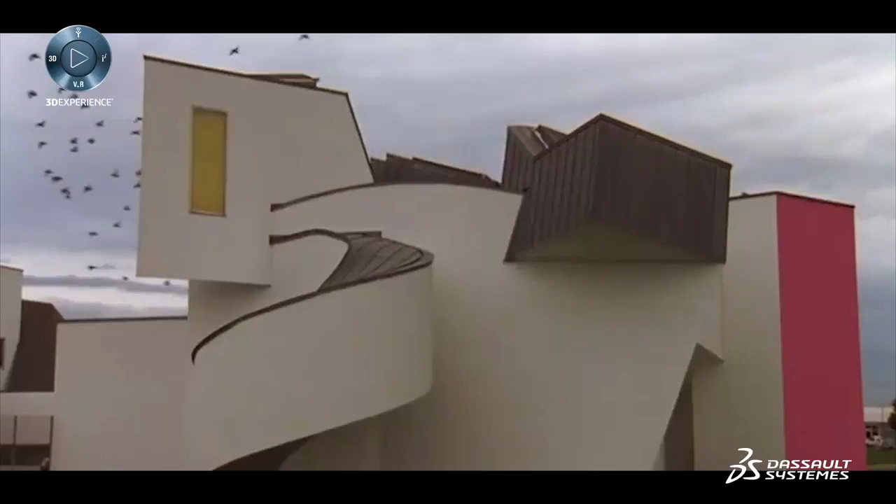I want to guarantee that we can build that vision. And I want to guarantee that we can build it at a price that the owner can afford.

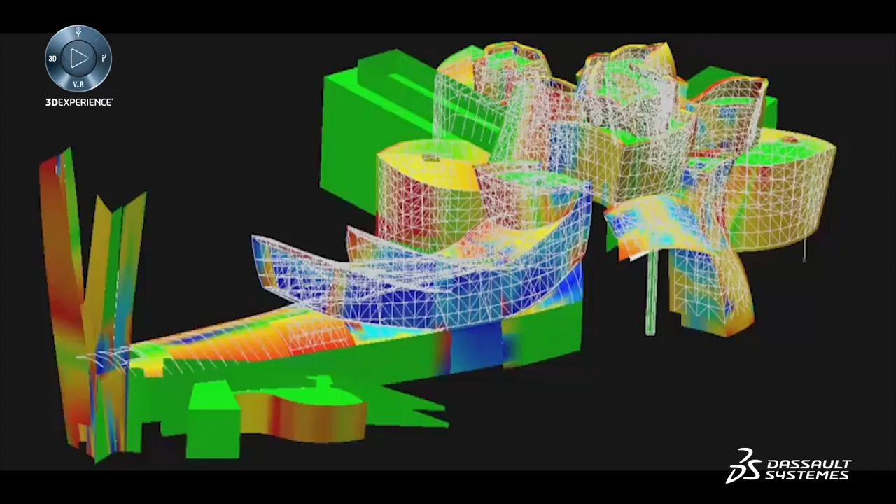The first project of significance was Bilbao. And we took our team to Bilbao. They spent a week with the 6 steel subcontractors, and they trained them how to use CATIA. And the bids came in 18% under budget, 6 separate contractors, and a 1% spread. And when I saw that, I realized we got powers here that architects don't usually have.

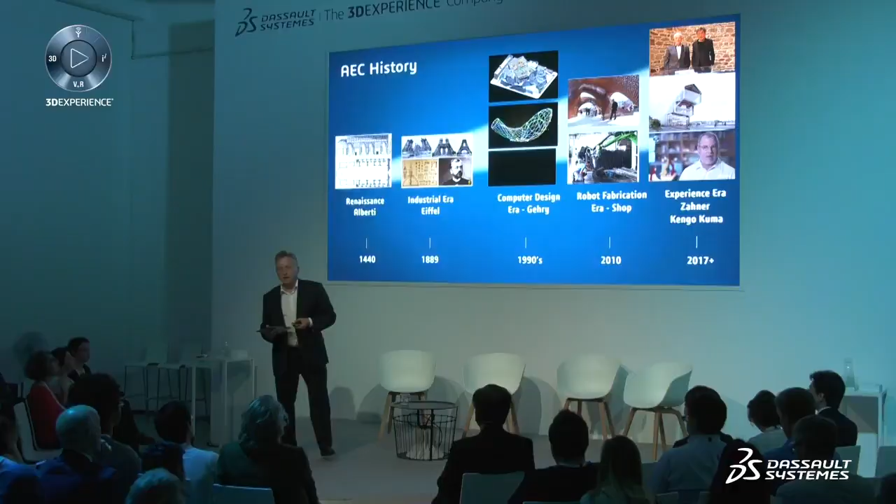18% under budget - this is something I think we don't see very often in the construction industry.

Then, of course, in the year 2010 came the new world of making, the new way to fabricate. You all know about 3D printing. Some architects, like Shop Architects, imagine new shapes, new structures that would not be assembled, but printed by a robot in one piece.

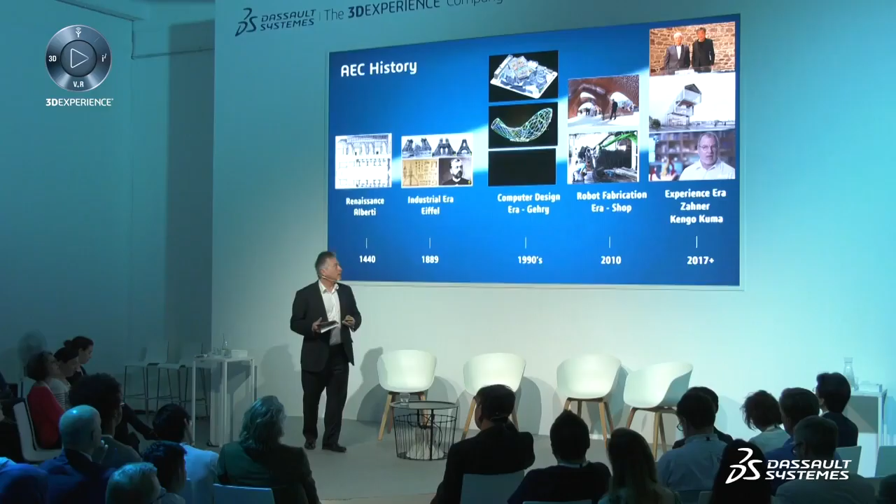And they have erected what is now the tallest, the biggest 3D printed structure in the world. This is located in Florida, and you see a picture on top. It's a little kiosk, and this was completely automatically manufactured from the shape defined inside CATIA, and completely robotized.

By the way, this is also the era for automation. It's extremely tedious, of course, to model a complete digital mock-up interactively. So Shop also created a way to automate the process. They created the Barclays Center in New York, which has 12,000 panels. And those 12,000 panels, with all the attachments, all the rivets, all the fasteners, were created automatically.

Just to tell you an anecdote, during one of the nights, the architect came and said he wanted to change a curve on the original shape. And they generated the 12,000 panels again over 2 nights. So this was the era of automation and fabrication.

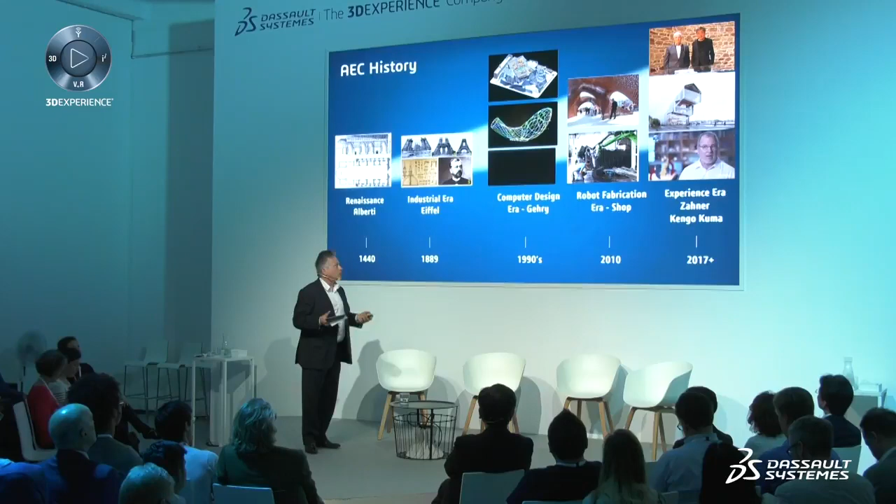Last thing is what we call the experience era. In the experience era, we see transformation again. I quoted 2 examples. One of them is Bill Zahner, who is a facade maker in the United States. And of course, we'll speak about Kengo Kuma, who is also extremely visionary in the way architecture will evolve. Let's listen first to Zahner about the dynamicity of the construction industry.

Today, everything is rigid, not moving. Let's listen to what he says about that.

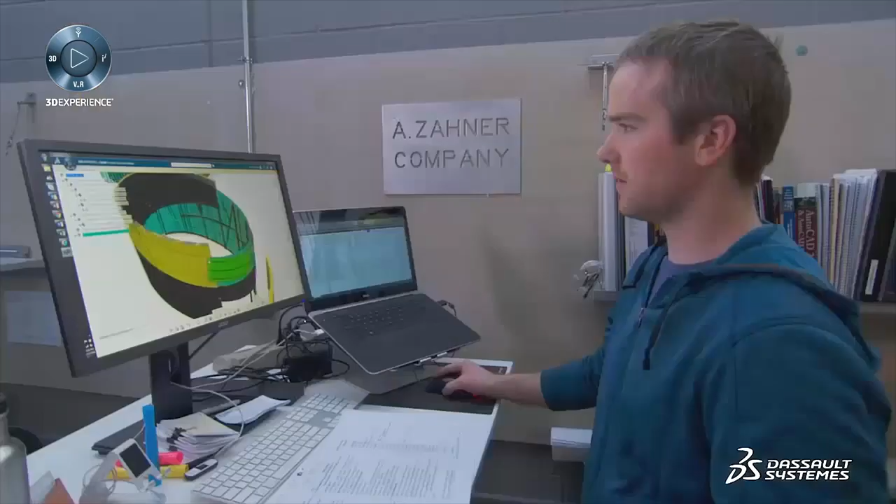One of the biggest changes, I think, in the future are going to be the dynamic aspect, kinetic aspect of facades or of other constructs. It's going to be how they're going to change in shape. And 3D experience is going to allow you to predict that and know what it's going to do, know what sort of forces are going to be exerted on that shape as it's moving. And it does it in such a way that it's going to open up avenues to the design community and fabrication community to do some really amazing things.

So buildings which are breathing, which are moving, which are changing shapes based on your emotion. A second illustration is what we have installed here, the breathing sculpture that you see there, which of course is extremely dynamic, connected to nature. And I'm very proud to share this session with Kengo Kuma, because Kengo Kuma has a philosophy of breathing material and applying material mimicking nature.

So he will speak about that in a moment, so I will not spoil the whole speech, but I'm very proud to say, for example, that Kengo Kuma was awarded to build the next big museum, the Oceanic Museum in French Brittany, to replace the existing one, which was a little bit not breathing enough, I would say. So this is a picture actually taken in Saint-Malo, who is hosting this new piece of architecture.

Then we introduced life cycle management with manufacturing, maintenance, and diversity of products. And I like to tell this story - we invented this in the year 1999. Some people in the AEC industry call it BIM, Building Information Model, but this is exactly what PLM does for all the other industries.

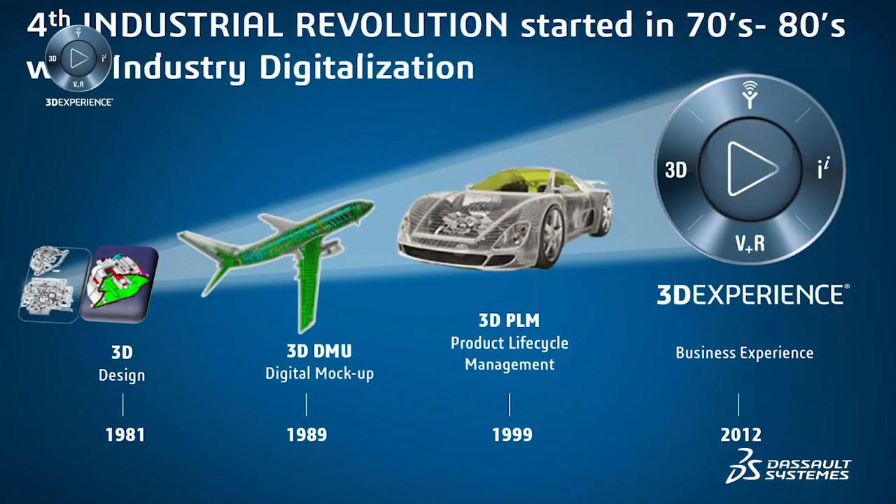So we're moving to the next era - designing in the age of experience. That was the theme during the whole day. So I will try to explain to you now the principle behind designing a building in the 3D experience context. You see here, sometimes it's very funny, the roads are crossing - the roads of the history of architecture, engineering, and construction, and the evolution of Dassault Systemes' portfolio up to the 3D experience.

So the revolution is underway. Now, we are together in the experience economy. Designing a product is not enough - I think you heard that during today's sessions. And we need to design holistic experiences. So what do you value the most when you're designing a holistic experience? You need to have everyone understand the experience you're developing, so you need strong collaboration. So let's look at how you can understand the whole experience.

An experience starts as an imagination, as what we call upstream thinking. So ideas which are brought into 3D.

Then you need to design and engineer them. You need to be able to manufacture, construct all those experiences, which are a set of connected objects. Finally, to sell them and to understand how it's used by the end user.

And this is done thanks to the 3D Experience platform. You see the logo here, which allows you, like an operating system, to run all that business in a single environment.

We strongly believe today that the construction industry should be connected to the city. Because when you build a building, you build it usually inside a city, so you need to take into account the citizen, the traffic, the sewage system, so you need to connect the building to the city. So there is no way you can design a building without understanding the context, which is the city.

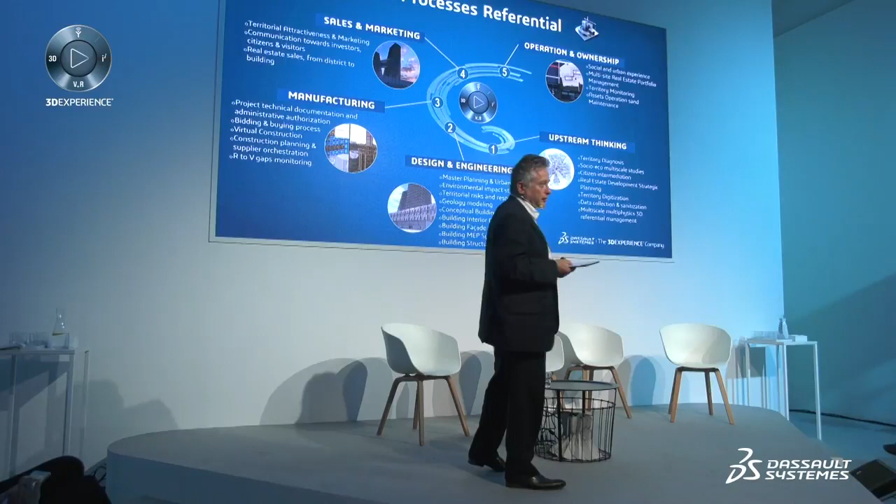So if we have here the whole value stream that I just explained to you, the upstream thinking is about understanding the territory where you're going to build the construction. You need to understand socio-eco multi-scale studies to understand the impact on the citizen. This is where you take the whole decisions about how the building will look like, what's going to be the impact on the citizen. Then design and engineering.

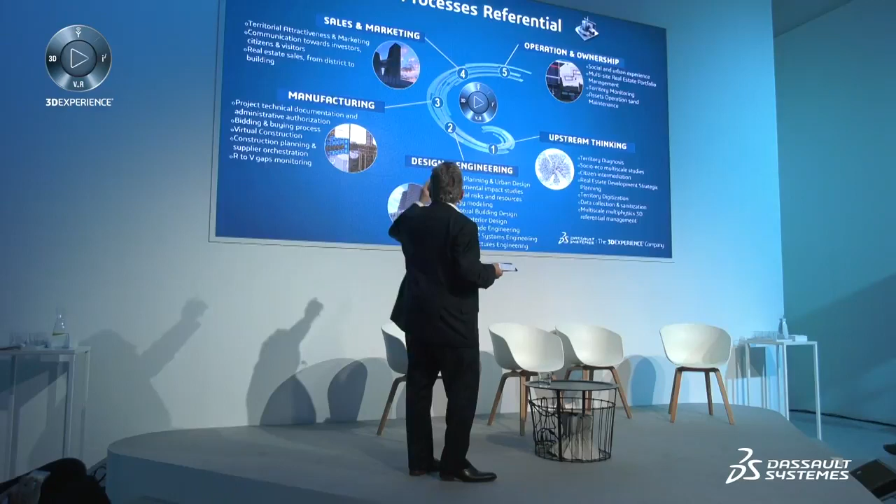So you do the master planning, the urban design, the environmental impact studies, the geology modeling underground. You cannot build a building if you do not understand how the underground is done. Then you move to the manufacturing and construction, and finally to the sales and marketing.

So all the stakeholders that are in charge of those steps need to understand the same thing. When you start the upstream thinking, the manufacturing people need immediately to understand what it is about, to be able to forecast. So the first topic is, how do you all understand the same thing?

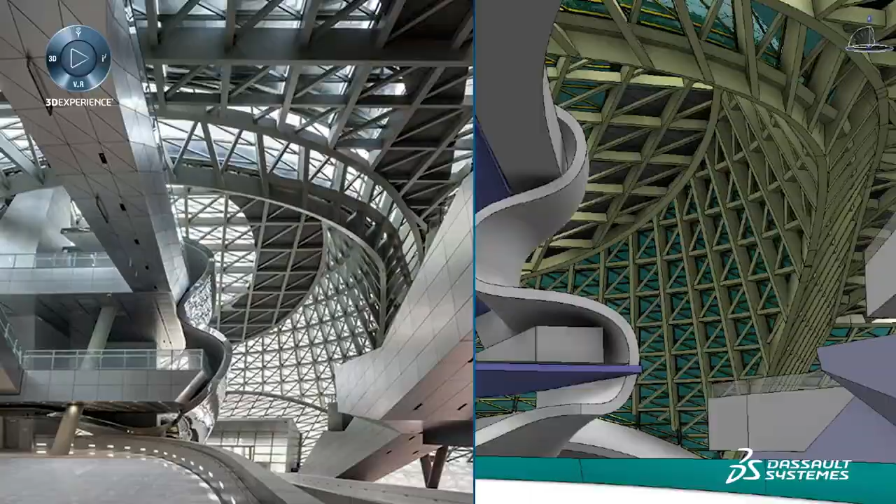And the first language that is natural is the 3D language. It's the one that supersedes the drawing, that can be mixed. And you see here, the real world, the virtual world. So in advance, of course, you can understand how the perception of the building will be even before it exists. This was taken 5 years before that was actually erected. So that's the first thing to understand. 3D experience is 3D, and 3D is the best language to understand.

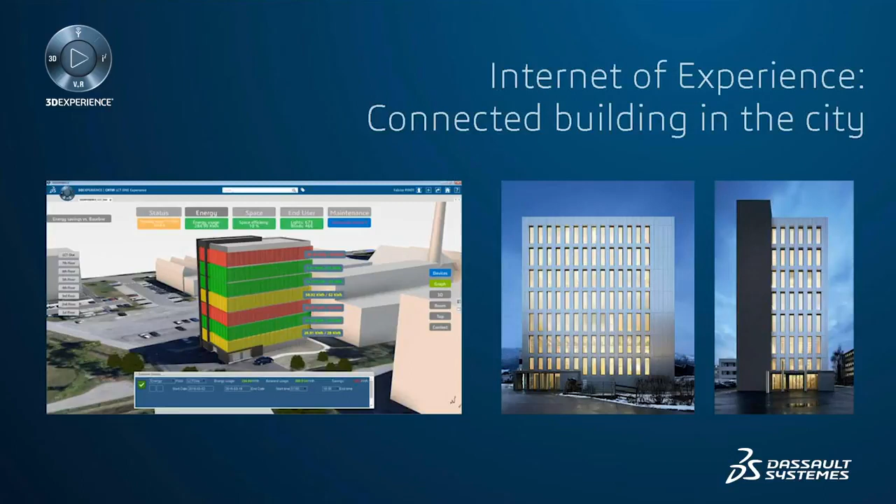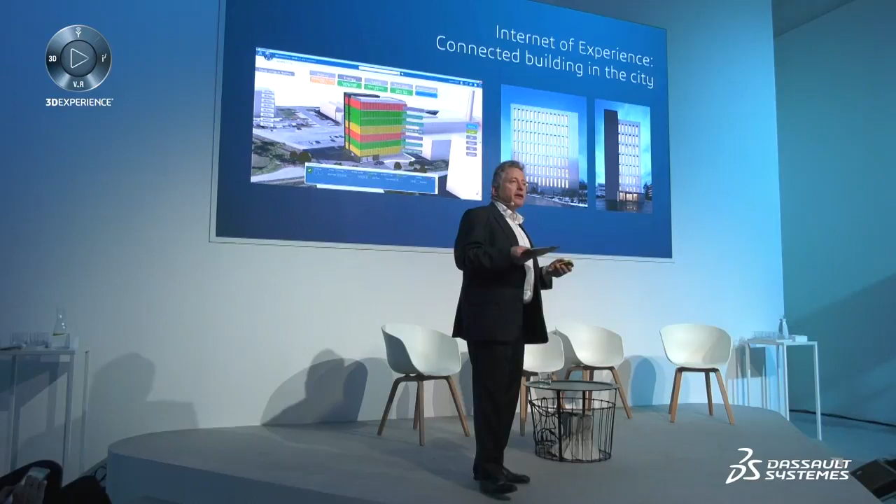Then you need to understand how the building will be used. So I have a small example here of a connected building. This building has 2,000 sensors. So let's see a day in the life of the building when it's in operation.

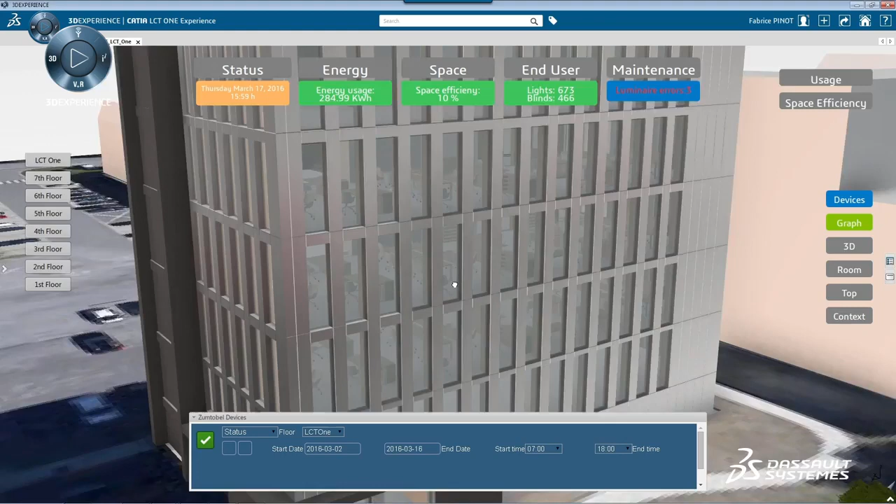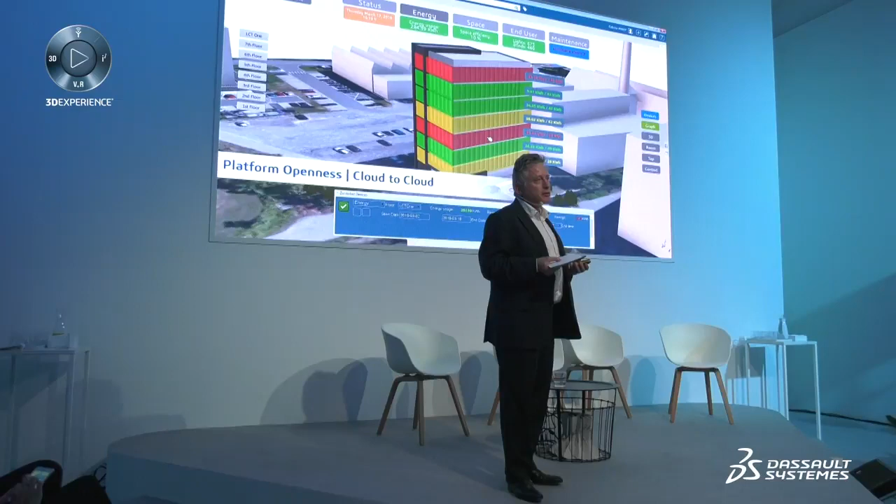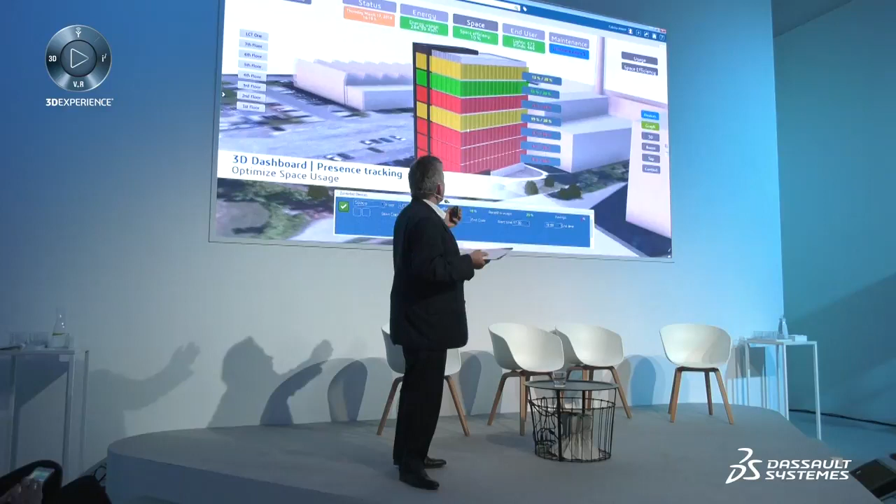So in this building, we can simulate, we get all the big data information that the building is emitting. For example, the consumption of the power. So you immediately see as a building owner in which areas the consumption is too low or too high compared to the cost profile that you had estimated.

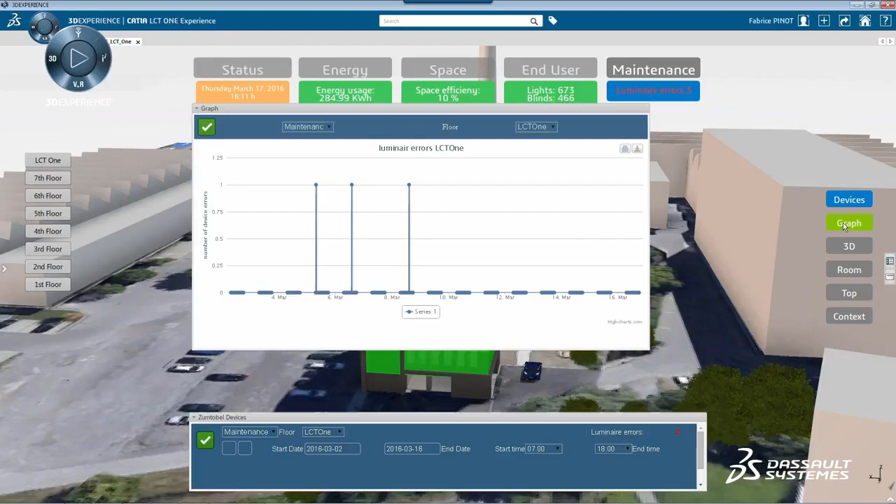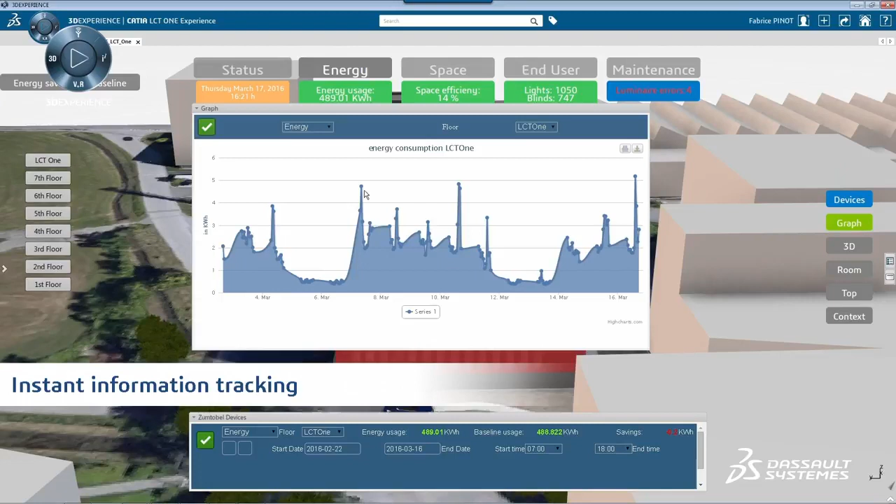Same, the maintenance, how many failures do you have in the building? So instead of throwing in a lot of data, you have the 3D as a language to see how the building is going to be operated. And you can forecast what will happen a day, for example, when it's too cold or too warm. This is what we call an intelligent building. So this is really about, in the platform, being able to not only see a static view of the building, but the building in operation.

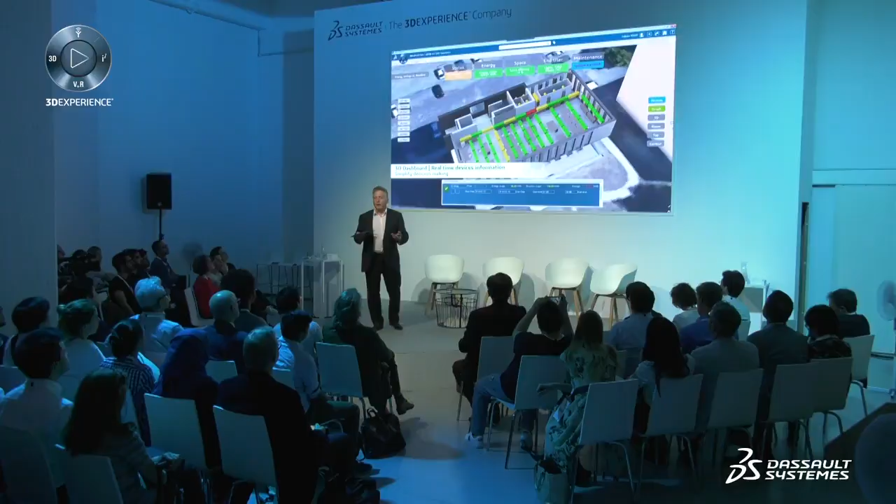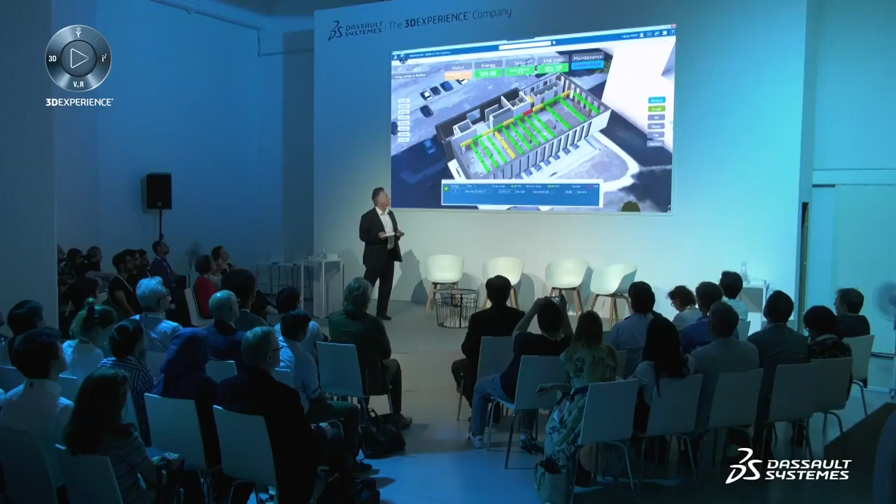This was also an example where there were some sensors detecting the human being, and this tells you which are the areas, for example. This was the lighting errors, the lighting failures during the day, either global lighting or local lighting. So this is what we call a 3D dashboard.

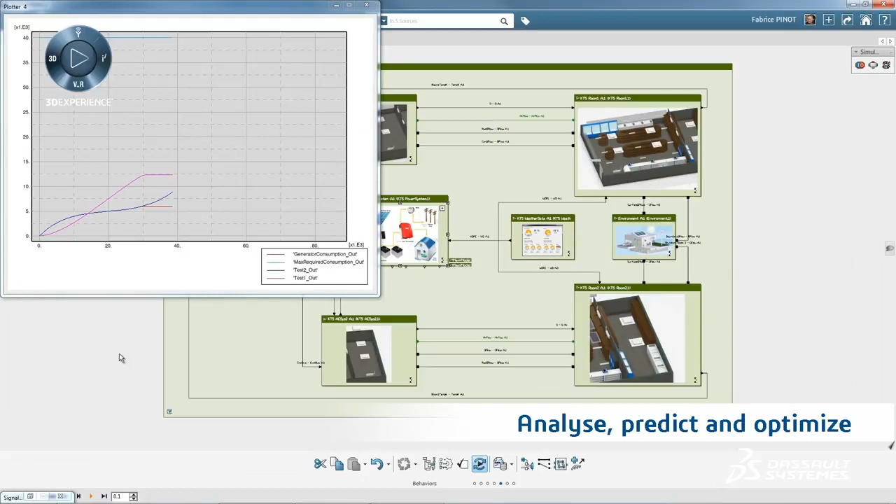The second thing that virtual world allows you to do is to do things that you cannot do in real world. So let's look at this one.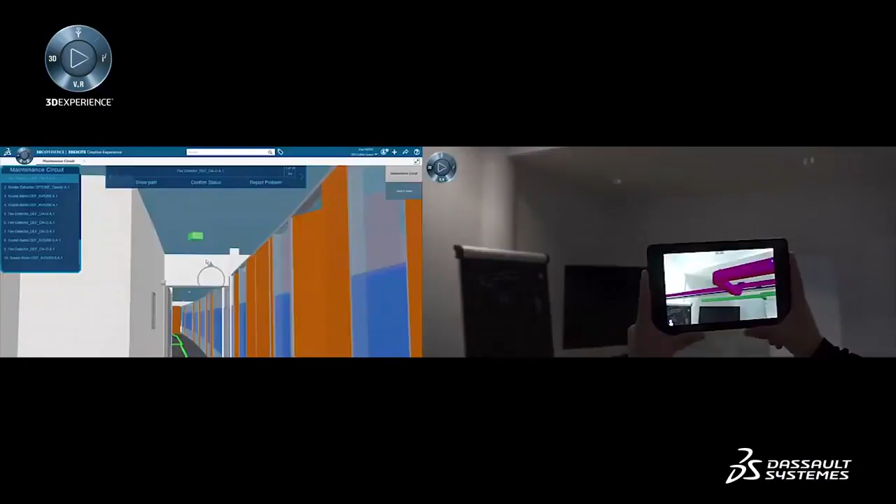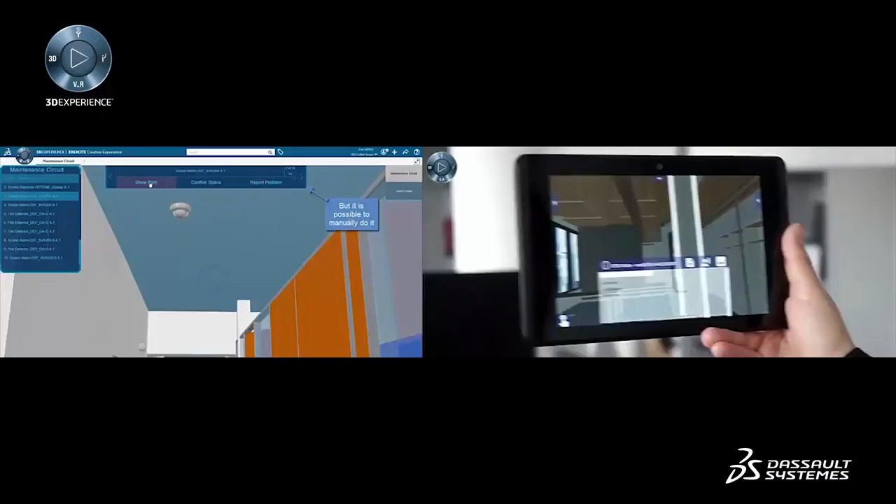First, you can navigate inside the building and get to the technical documentation of each of the devices. Usually this happens with virtual glasses, so this exists today in the platform. You pass along the building, check the maintenance status, and access the documentation with your heads-up display of all the different devices in the building. This is how to understand how the building is operated.

On the right side, you have also a problem on some pipes running under the floor. Of course, you can see where they are even before digging, because you have the 3D experience twin, the digital twin of the building. So again, the whole topic here is how to understand.

The second thing is how to imagine the building inside the city. We believe a revolution in the AEC, construction industry, is to design a building in the context of the city. With Boeing, what we started to work on 20 years ago is to design a part, a wire harness for example, in the context of the fuselage. This is exactly the same. You design a building in the context of the city.

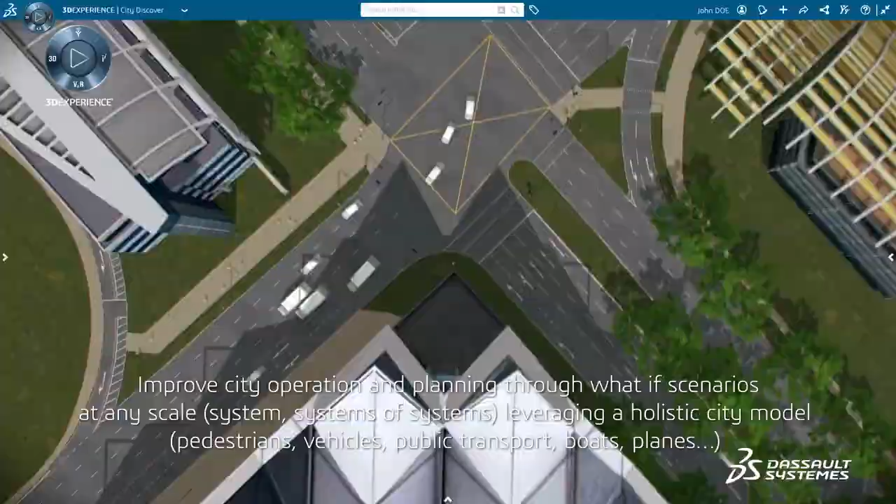Let's look at an example of what has been accomplished in the city of Singapore, whereby the whole city, with all the different layers of information, the traffic, the students going from one point to another, were modeled in order to make the life of the citizen better.

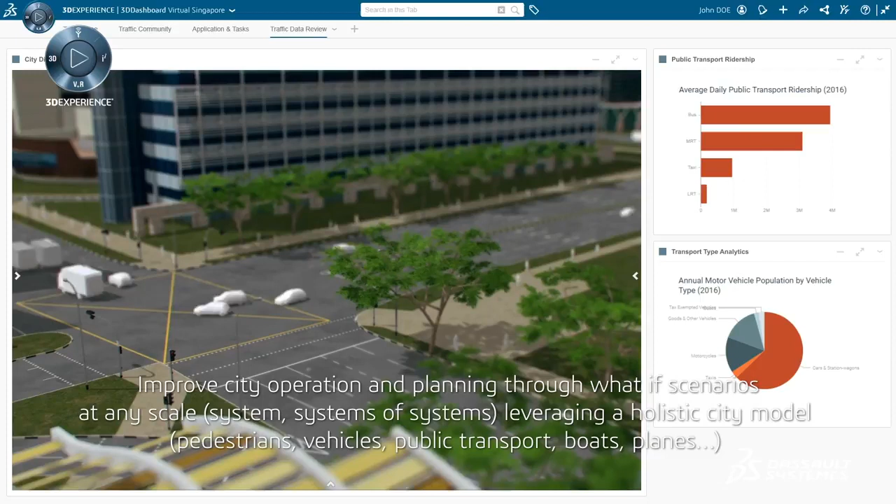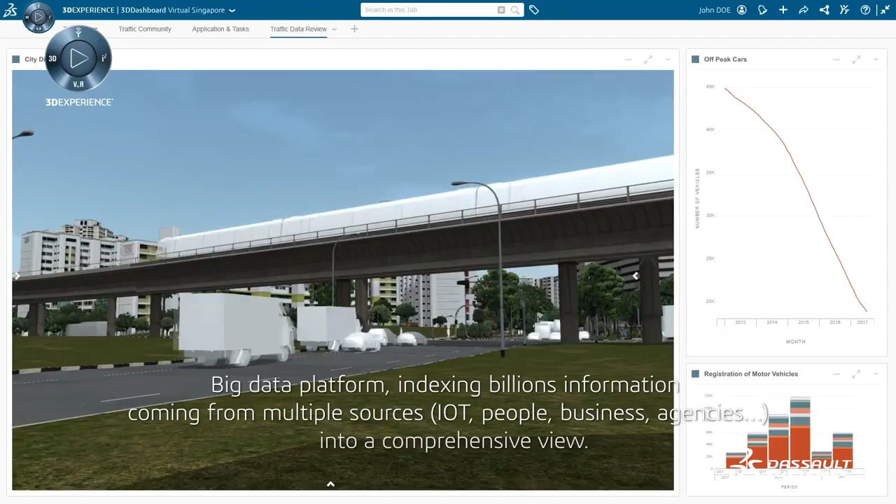This is what we call 3D Experience City, which allows you to monitor not only a building, but what we call a system of systems. So 10,000 buildings together, and the different flow of information between all of them, the flow of people, how it affects the traffic.

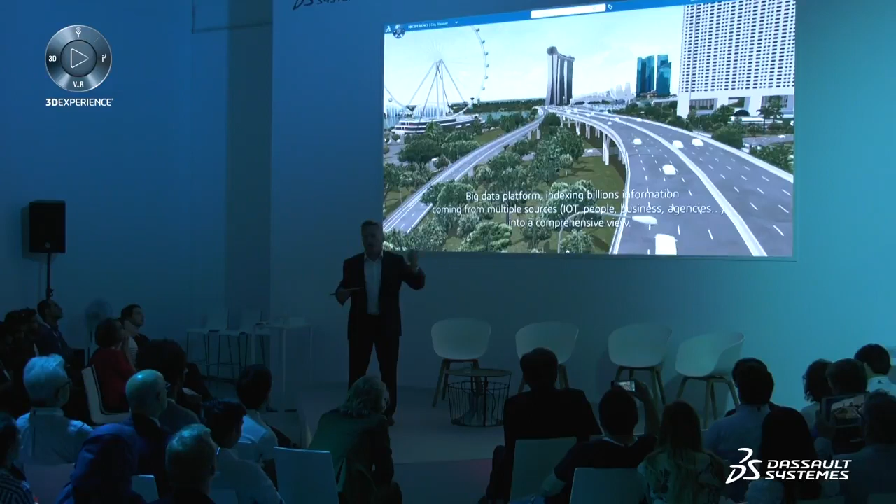Once you have this 3D experience twin of a city, you can take the right decision to remodel, for example, a complete block, to install a new bridge, or even here in Singapore, they're thinking about moving the harbor from south of the city to the west of the city. They would immediately understand the impact.

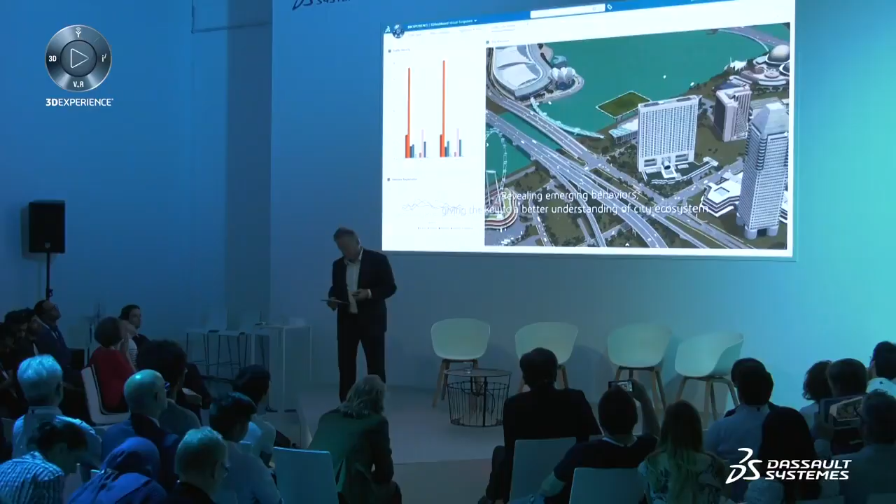We can relax and listen to the music. And stop myself talking.

So this is the environment in which we are, which is the city modeling.

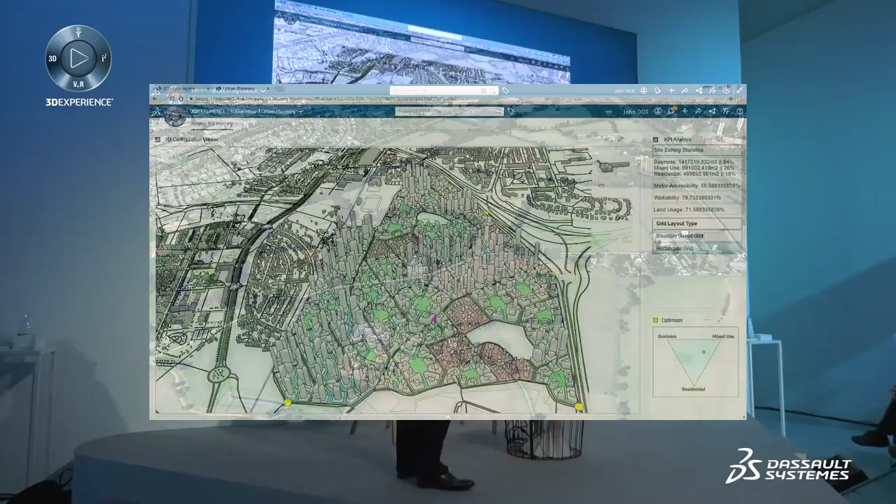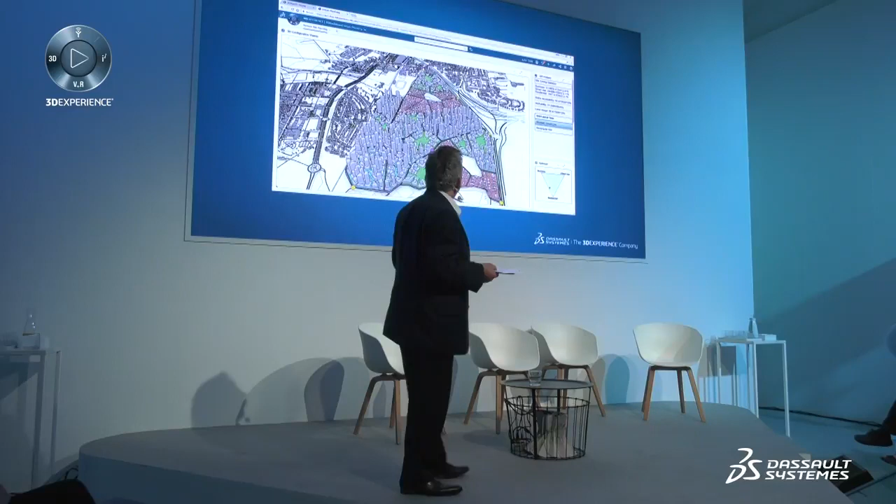The next thing is, when you need to establish a new building, you need to do first urban planning. Here a small video: this is a reorganization of a piece of the city of Rennes in France, where they want to create a new metro line. Due to this metro line, they decided to install new buildings on a given block and territory. For that, it's a very difficult problem to solve, because you need to optimize the citizen constraints, and optimize all the different networks, roads, infrastructure.

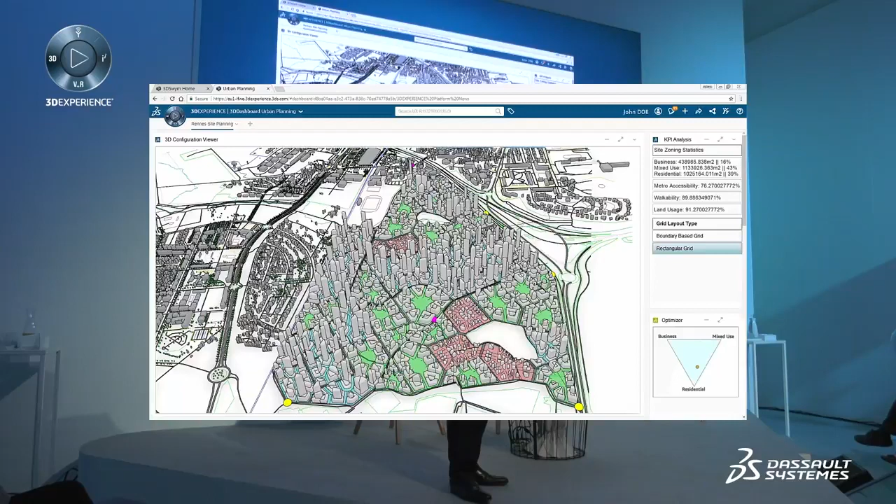So what the 3D Experience platform is doing here is a robot exploring all the various alternatives of organization of the buildings among them, and optimizing the criteria you gave them. So instead of construction today having maybe 1 or 2 alternatives, the robots inside the system generate 1,000, 2,000 alternatives with the right criteria for the human being to choose. This is what we call a cobot, a collaboration between a human and a software robot.

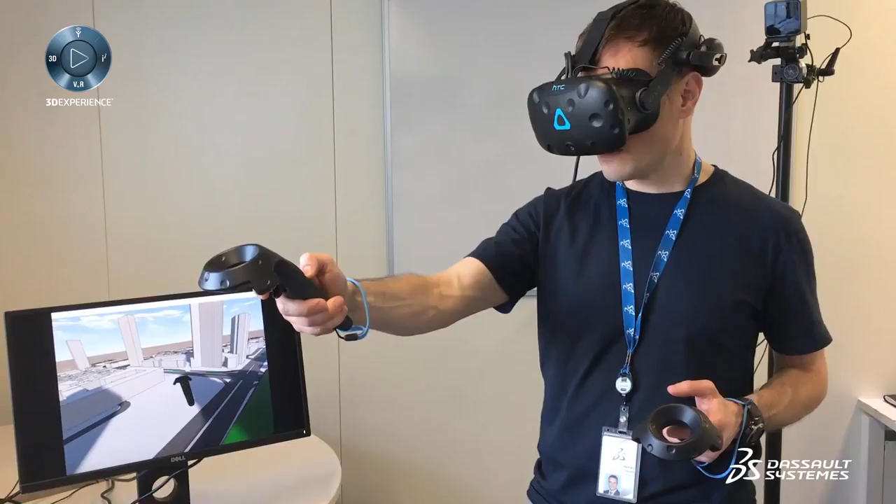Of course, once you have done that, you have the principal massing of the building. You use virtual reality to start modeling the masses of the building.

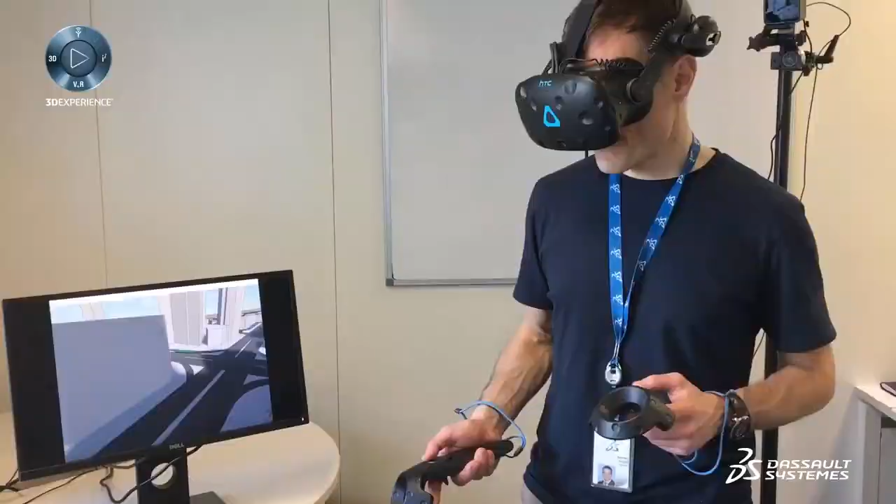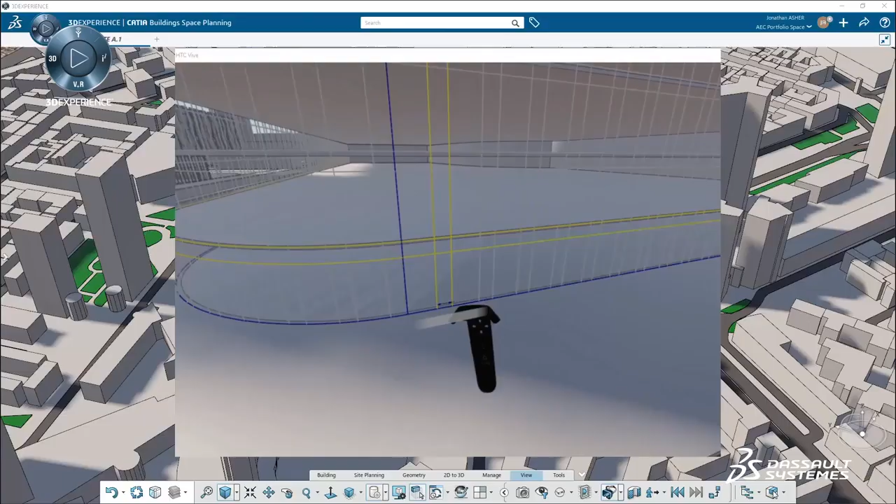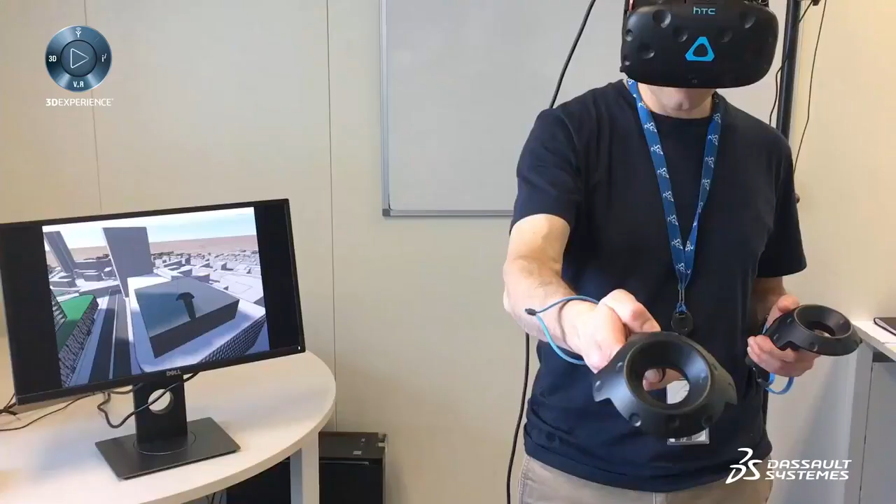In a very natural way, we tried and succeeded in escaping from modeling 3D on a flat screen. It's completely incredible that today we're speaking about 3D, but still everything is shown on a flat screen. When you put those glasses on top of your head, you can feel it. It's very difficult to see in a video like this, you need to try it yourself. But you're completely immersed in 3D, and you take the right decision instead of going back and forth on a flat screen. This is typically a building that was completely conceived using this 3D, immersive technology.

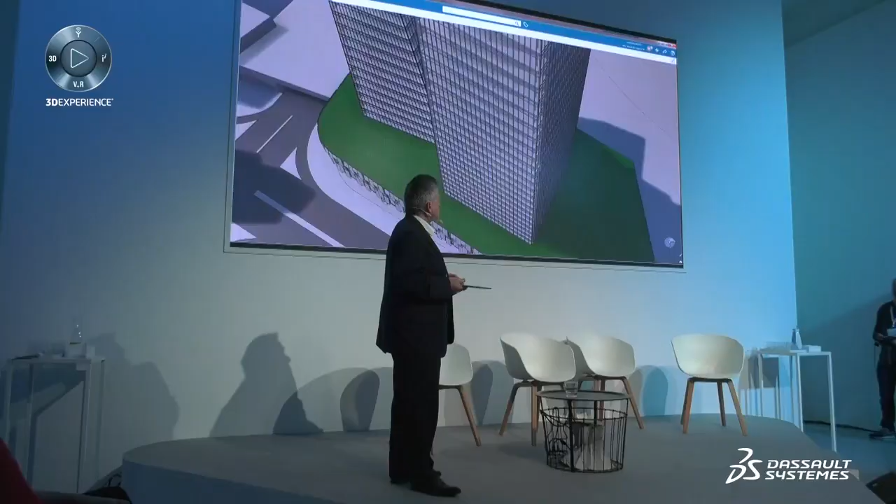So I think you start to understand a little bit the revolution undertaken in this industry. And of course, design does not go without simulation, so you need to simulate the impact to the citizen's wealth. How many days of sun is each apartment going to have?

So, you remember how to understand the experience, how to imagine the experience. The next stage is how to trade, how to collaborate. I invited a small company in the movie here to explain how things can be traded, so experience can be traded among the different partners.

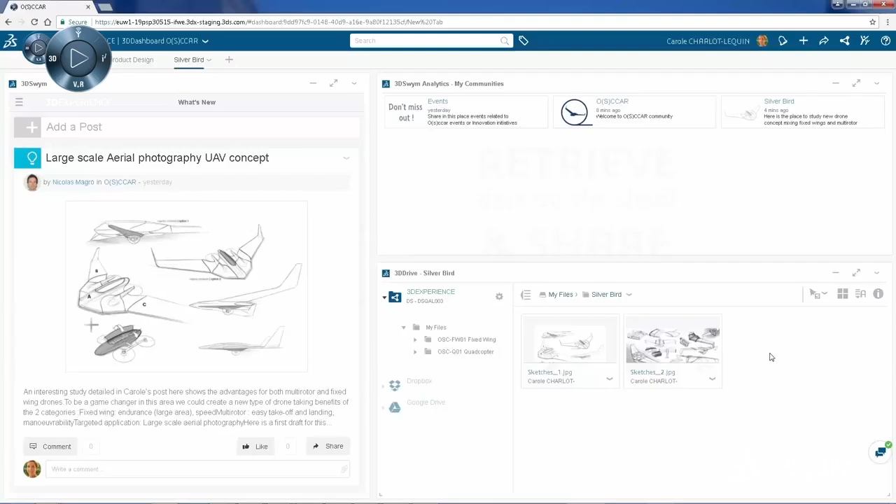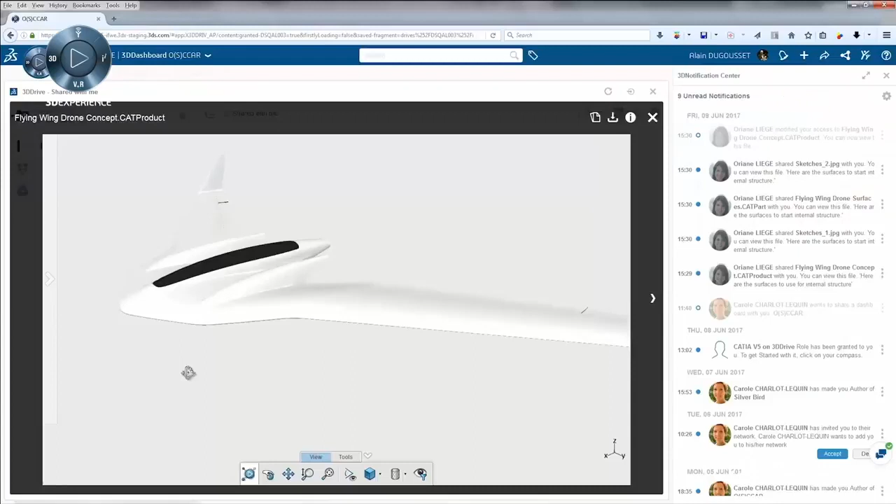Cecile, CTO of O(S)CCAR Company, found an interesting idea browsing the community of the company. She shares it with Carole. Carole saves useful content on her 3D drive, so she can kick off the project easily. She shares the sketches to the creative designer. Oriane receives the notification and visualizes the shared content. She directly opens CATIA V5 from the 3D Experience platform, creates the surfaces and synchronizes on the cloud. She shares the CAD product with the two engineers of the company and contacts Alain. He visualizes the 3D model with 3D Play and starts working on the internal structure.

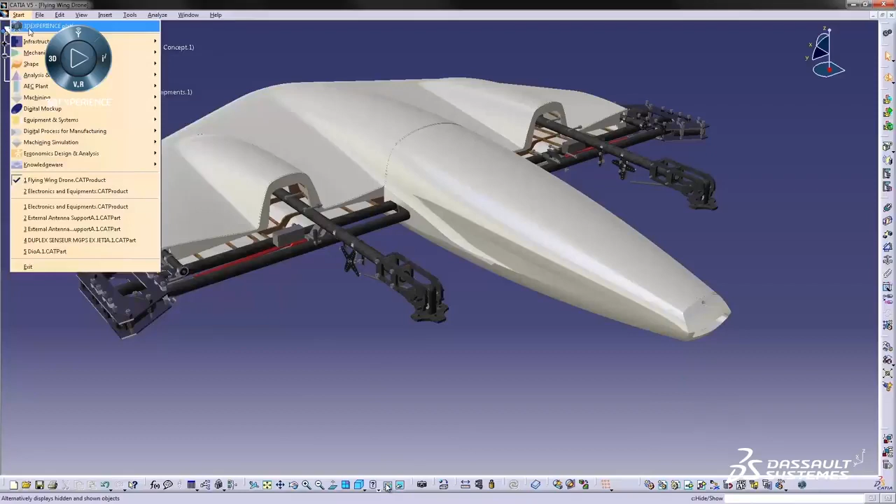Once finished, he shares his design with the electronic engineer. Roman is working on the battery of the drone. From CATIA V5, Roman accesses 3D Compass and his drive, then shares his design from CATIA V5.

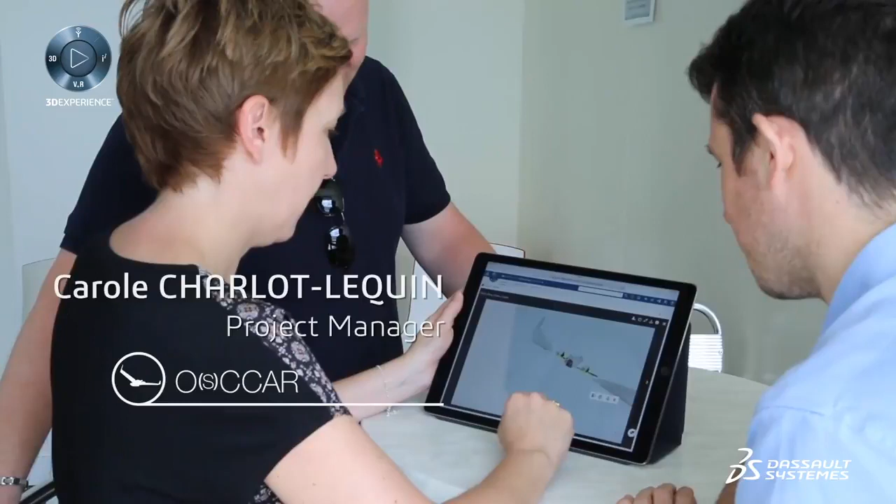Carole, Alain and Roman review their design creation all together. They explode the design geometry and enjoy a playful experience. The drone design is ready to be printed.

So this is, in one minute, what the platform offers as a collaboration environment. Sometimes I present it to my current users and tell them how you become a hero - how in one click you can share your design, and trade your design in less than one second. That's the power of the platform: to trade inside communities and share different designs on a device like an iPad, for example.

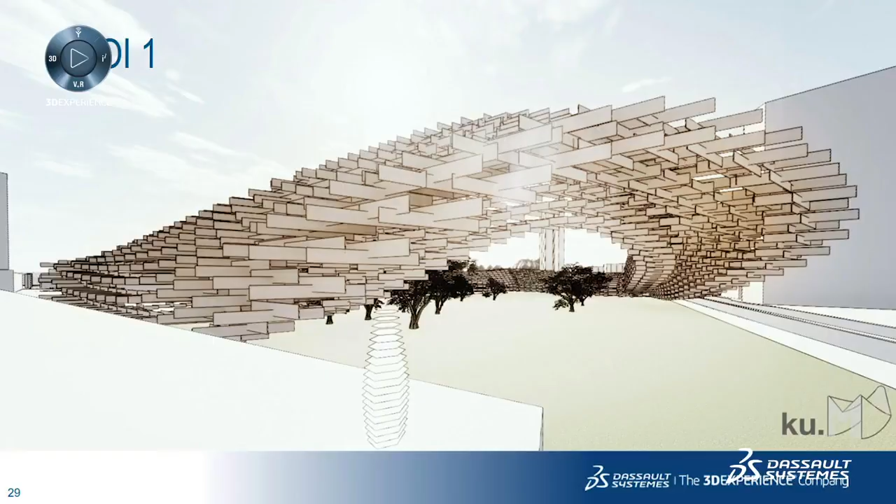And we pushed the platform and the collaboration to the limit. You need to understand that last year in Milano, we ran what we call a hackathon, which is to have architect teams coming together and during 24 hours create stunning experiences. I would like to show you the results of using the collaboration platform. The teams were made of 4 people each, and during 1 day and 1 night they performed what you will see. I will share the results with you, and browse the different experiments designed by 6 teams last year.

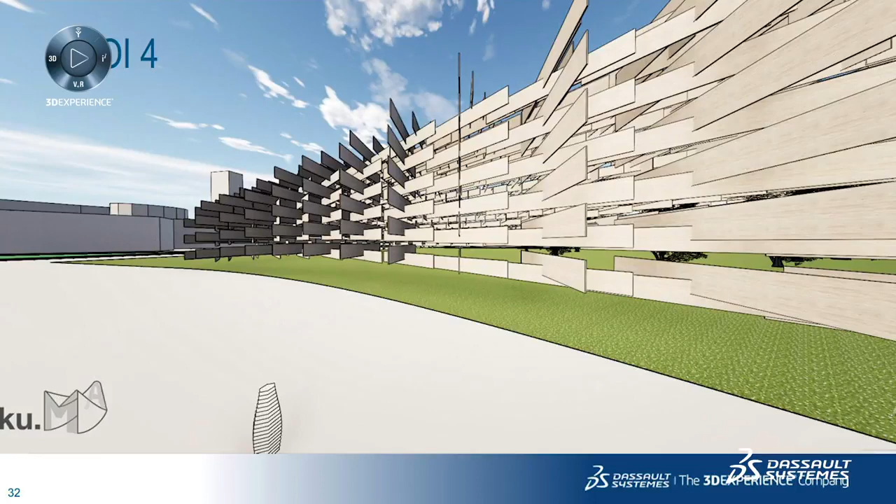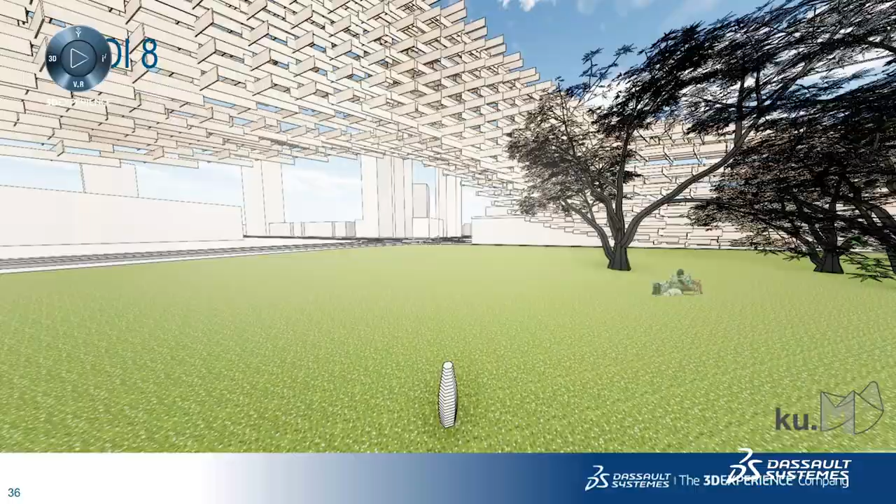Again, they started from scratch, 24 hours using the platform. This is a quite interesting point of view, which is harmonizing product and nature. I will browse quite quickly.

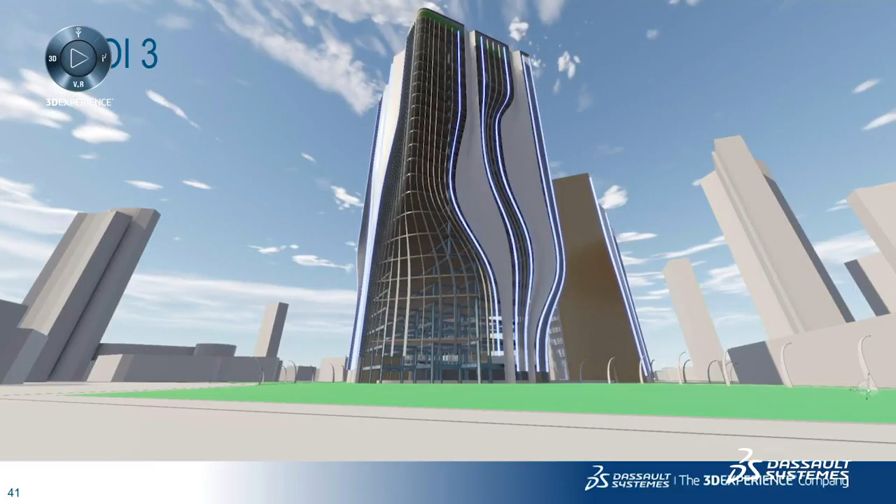This is a more traditional way to represent an architecture. Each team was given a territory, and they needed to stay in that territory and offer a point of view of the buildings in 6 different points of interest: number 1, understand; number 2, imagining; number 3, trade and collaborate.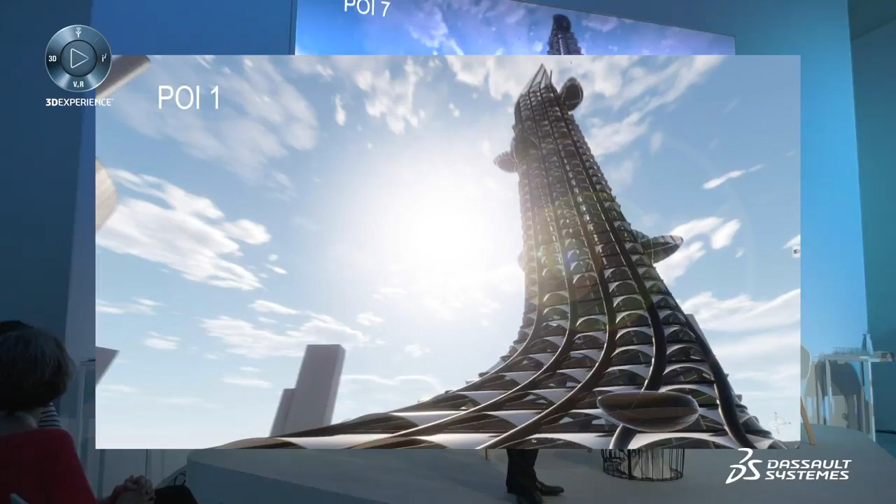By the way, this was the winning project. 24 hours in order to create this experience.

Now, the last point is how do you produce? Instead of explaining you A to Z how to produce, I wanted to have some people from CadMakers explain, per video, how from imagining the experience they are immediately able, thanks to the platform, to produce it. Let's listen to them.

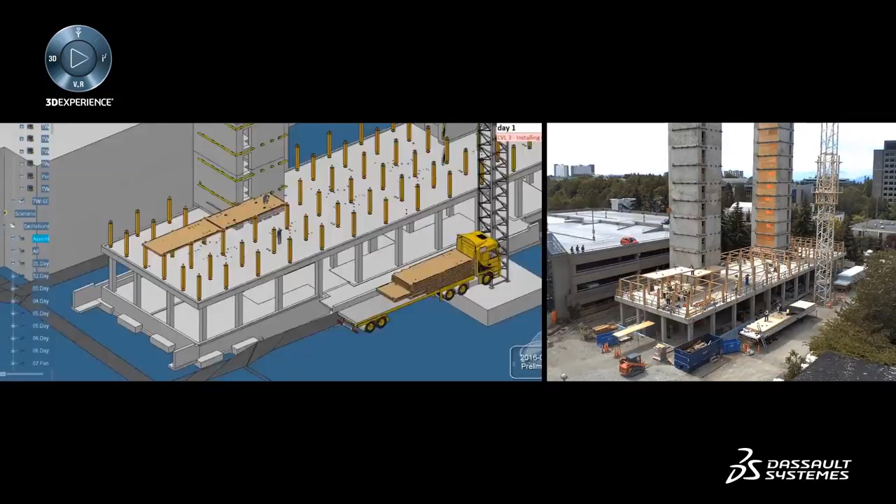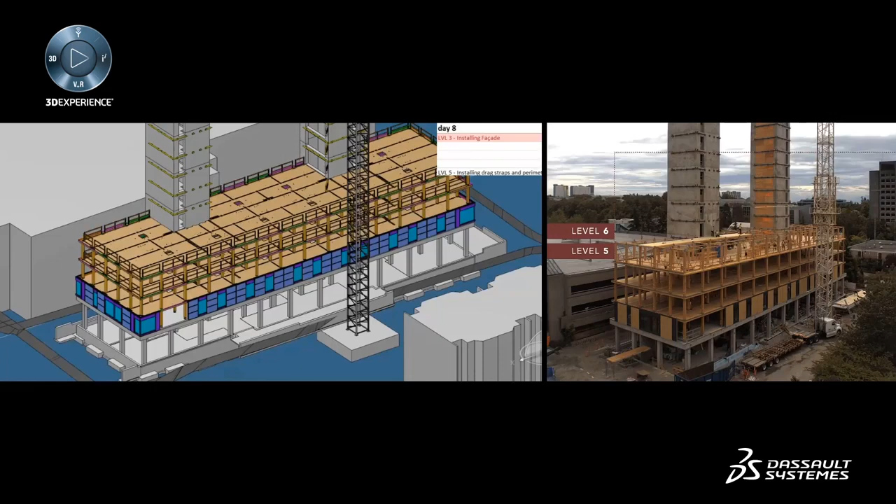The Brock Commons Phase 1 project is the largest, or tallest, hybrid mass timber project in the world, and a type of project that's never actually been built before. When working through the simulation and different sequencing options at Brock Commons, it was extremely valuable to load the Delmia simulation and test different sequences, thinking about how materials will come into site, in what batches. You saw the columns came in batches of 9, and then really thinking about the drivers of the project, most notably the crane time.

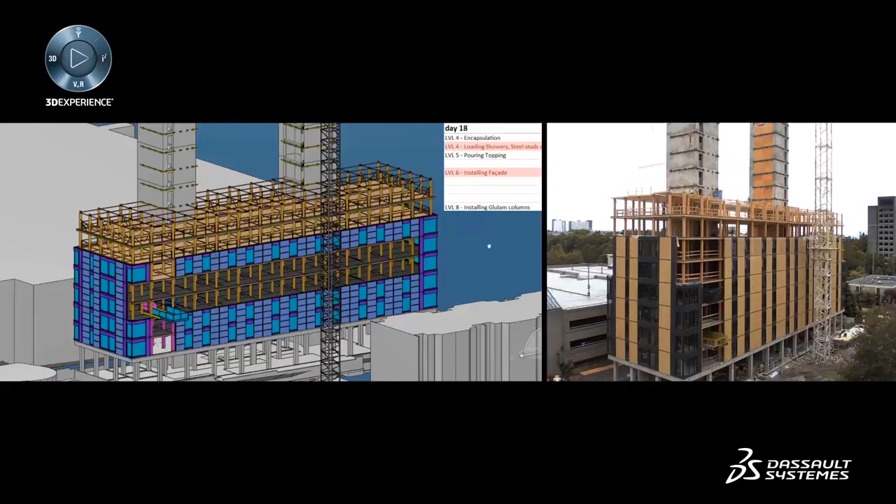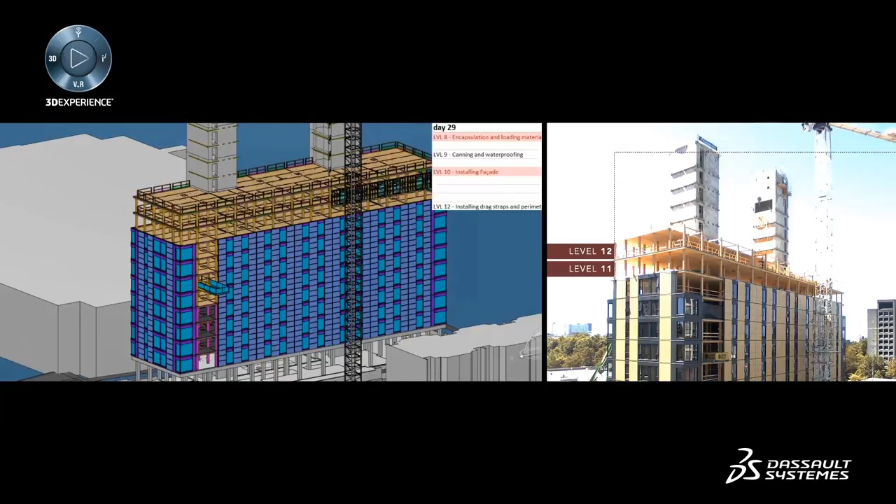The crane is always the most important bottleneck on a site like this. So in pink, in our DELMIA simulation, you can see what the crane's doing at all times, and plan sequencing of work from a safety perspective, making sure you're not doing work above part of where the crane is installing - a lot of advanced planning. The result was the project was 3.5 months ahead of schedule, which is a significant saving with regards to opportunity cost of capital and interest on construction financing. The speed the project was built was truly remarkable and a big driver for the customer's business. The Delmia simulation and collaborative design and simulation was very valuable to the project.

So this is what we call an experience twin for construction. That means the whole scheduling, the material, the whole logistics was forecast even before the work, I would say, had started. This is why you heard the gentleman saying the delivery of the building was performed 3.5 months before schedule. That's a benefit of what we call the 3D experience twin for construction.

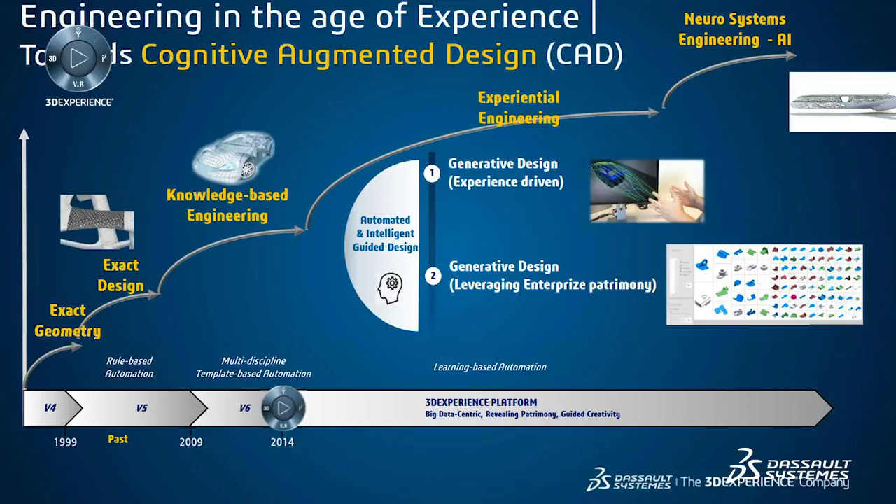So I went through the 4 steps: understand, imagining, creating, and producing. I just wanted to let you know what is next. Next is automation, automation, automation. For that, I will have a session tomorrow as well, going into detail of how we move from interactive modeling to what we call generative design - from the patrimony, from all the buildings you created in the past, isn't there a way to learn what you have done and teach the computer to propose you the next building? This is a whole story about generative design.